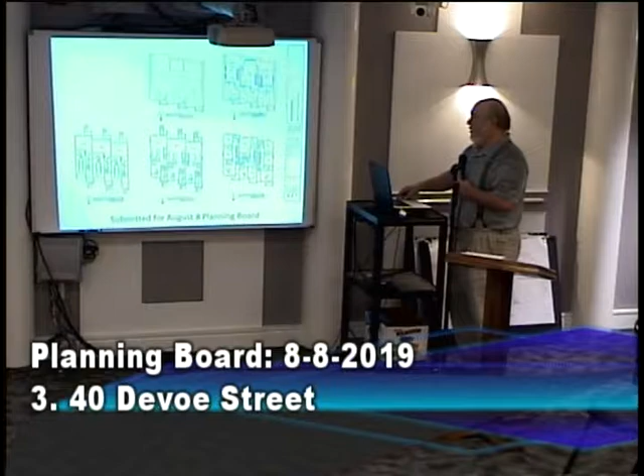These are the elevations, the massing that we developed. Obviously there will be more work done at some point on these, but we want to know which direction we're going first. This is just an enlargement of that front, showing as the units step in, they also step down the street. The garage doors here are 1-car garage doors.

Those are set back in 4 feet. So effectively what happens is there's this kind of play of massing, jogging in and out, and the garage doors jog back in to align with the unit next door. So there's a kind of relationship and weaving, which we think makes it work fairly well. Each one of the entrances is demarcated by a small court, so I think it would fit in very well with the character of Devoe.

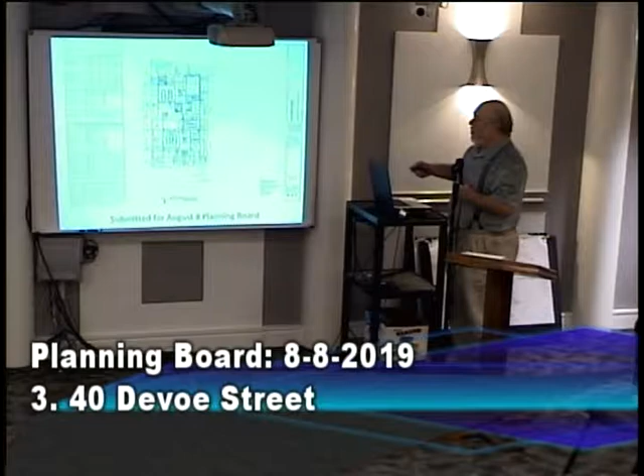The other unit we've referred to as the courtyard units. I'll give this a little more attention because we presented the other last time. The way this works is one unit is in the front, one unit runs the other direction, forming a courtyard with the third unit. All of the cars are in off the courtyard, and all of them are two-car garages, so all the parking is inside. The size of this courtyard is sufficient to accommodate people coming in and going out.

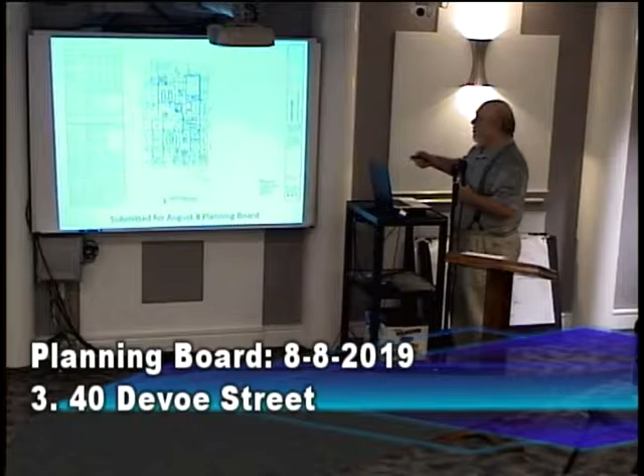There'll be no room in this courtyard for anybody to park outside, so all of the parking would have to be in the garages. The entrance to one unit is here, the entrance to the other two units is here. If we go further with this, we've been looking at what happens if we move this garage in further and have one entrance on this end, one entrance coming in that way, and then the other here. This unit also has an exit out to the courtyard from the lower level, so all three would be able to access the courtyard. This plan shows how that all works.

These are the floor plans. Again, the units are effectively the same size, around 1,950 square feet. All of them are three-bedroom, and they all have a small area in the attic.

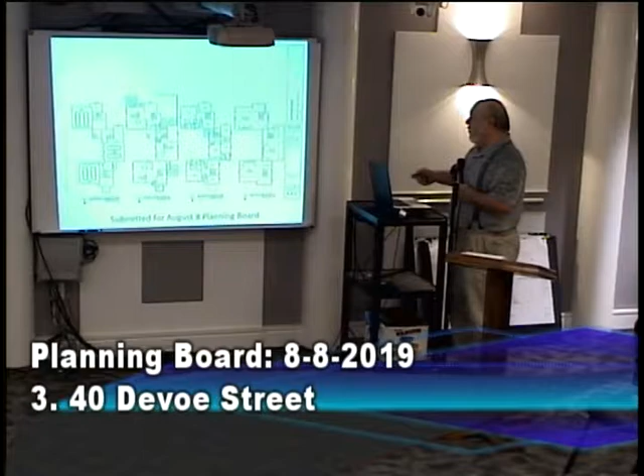In this one, we get a smaller room downstairs because we've got a two-car garage instead of one. This is the massing we looked at with it. The idea is to wrap the outside, have that be a relatively dark exterior, and then have the interior courtyard be stucco, so we feel like a bright, open space.

This is very simple at this point in terms of the fenestration, massing, and detailing. But we also think that if you look at the other houses on Devoe, that's an appropriate approach.

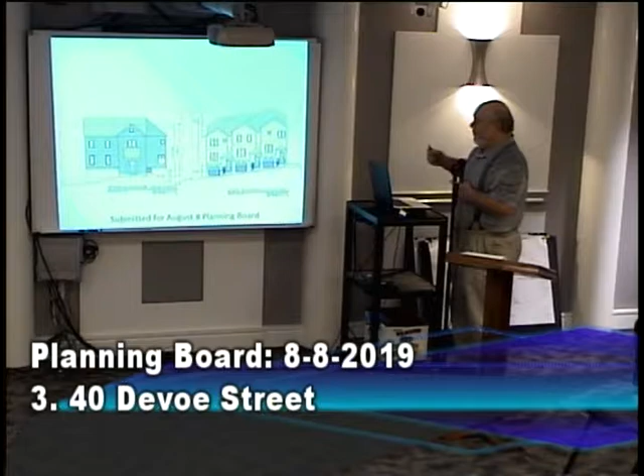Even the older houses have pretty much been simplified in their massing and detailing. So this is the two side by side - the grade here and the grade here are parallel to one another. At this end, this sticks up a little further, but it also jogs itself down and follows the street perhaps a bit more.

This again puts the three townhouses in their massing compared to the courtyard. You lose back green area in this scheme, but each of these units has an exterior terrace area that would work off of them.

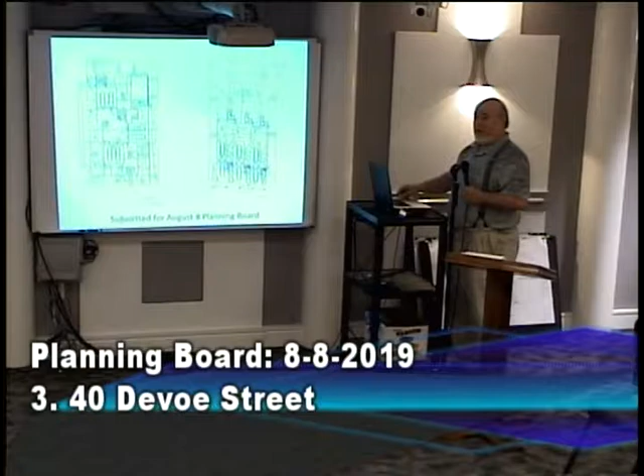The way I look at this courtyard is, you've got a 4-year-old who wants to be riding a bike or doing something - that would be a great place for them to be playing. I know it's weird to say, with cars coming in and out, but with 3 units, I think they'd understand that they're not speeding in that location.

I know that speeding was interesting - I had conversations with people about Devoe, and there's a major concern about the way people speed now. I think it's great that they have that concern, but when I notice what speeding is on Devoe, it's when somebody's going about 20, 25 miles an hour. It's a really nice, slow, quiet street, which it should remain.

We then decided to take a look at this a bit more in 3D. I can put the 3D model up if you guys want to spin around, but I found it's often easier if we just show you some 3D views as we go along.

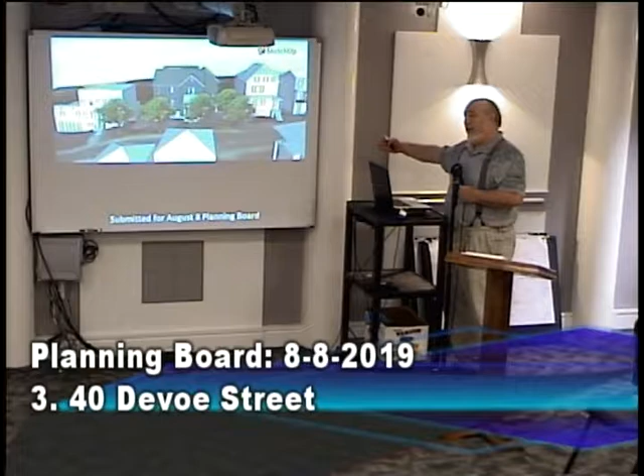This sits way further back on the property, so the other people who have backyards would be looking down and seeing the building instead of the backyard. So it's kind of a toss-up, I think, which is the better option.

These are all kind of parallel views to what I showed on the townhouses - that was from the east, this is from the west. This is looking down Devoe, and this is looking up Devoe.

This is the view from the east aerial, so you see the courtyard and the way that massing works. This is the back from the east and the back from the west. Anything you want to see again?

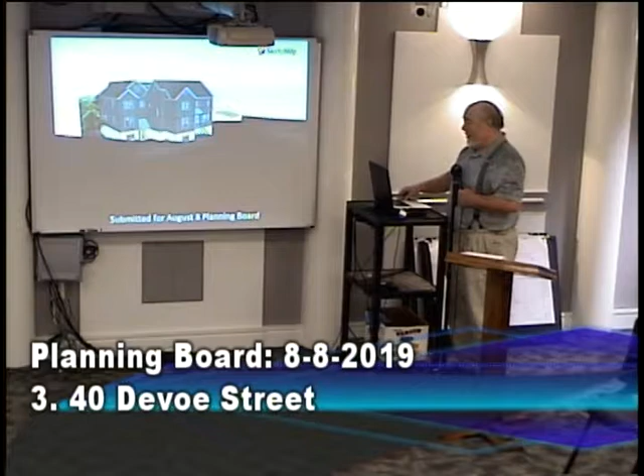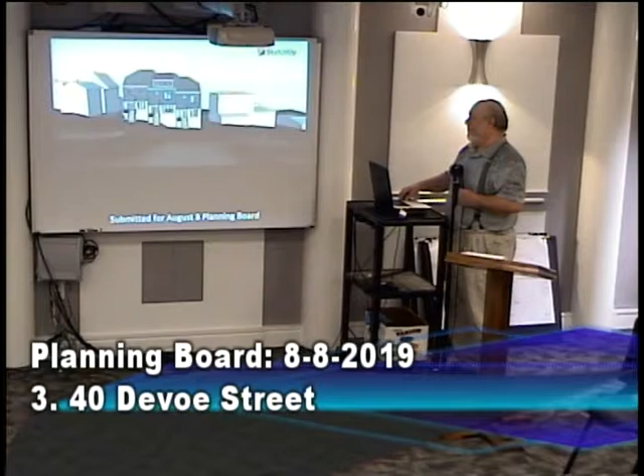Want me to try and do it in reverse? Well, thank you for doing all those views. Yeah, that's very useful, very helpful. So I'll just kind of stop at some point here, maybe, for questions and answers.

I think I was the one at least interested in seeing the courtyard version with a little more detail, and I like it. I think the way you've got it set up, it does fit the streetscape well in terms of that one building's side. But on balance, I would prefer the one you're showing now.

So you want to take a vote? I'm just the opposite. Are you telling me you prefer this townhouse? So first, I want to say I really appreciate the thoroughness of the presentation - there's nothing else we could ask for. We'll see how much agreement or disagreement there is, but I prefer the courtyard scheme.

But I guess that's what we'll decide tonight - the courtyard scheme.

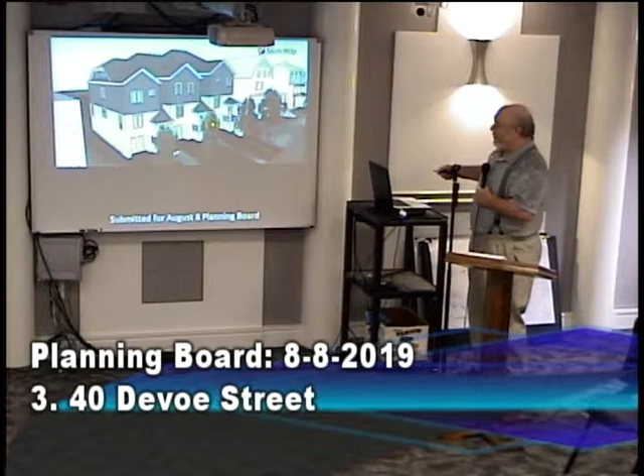Where would people that were visiting park? They would park out on the street. In the townhouse scheme, we've got extra room adjacent to the car, so you'd be able to get a guest pulling in off the street in addition to the other car - one in the garage, one outside. George will quickly say he doesn't think we've got enough, but we actually do have 16 feet, so somebody pulling up here has the ability to tuck the front of the car back in and definitely pull another car off the street.

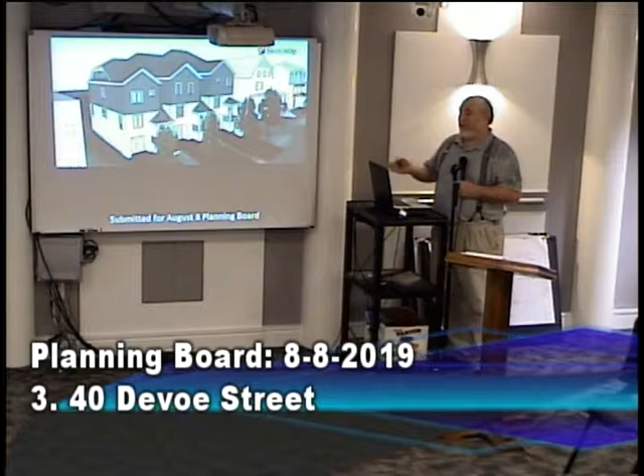And just to be clear, what you're looking for tonight is just clear direction about which of these two to develop to the next level? I would not mind if you approved it, but since we're not there yet, and he isn't here, and I'm not really certain he would, I'm just looking to move forward, whatever that means.

Right. Patty, can I see that view - I guess it's a 45-degree down view of the courtyard - so I can get a feel for what the rear yard massing is like? This one, no, from the street side of the courtyard. Well, it was a view from above. I thought there was one. Yeah, there it is. Thank you.

Right now, some of these go pretty deep back toward this house next door, but we're effectively a unit further with how far that goes into the back. Now, in other ways, that probably gives some privacy to the yards of the neighbors on both sides.

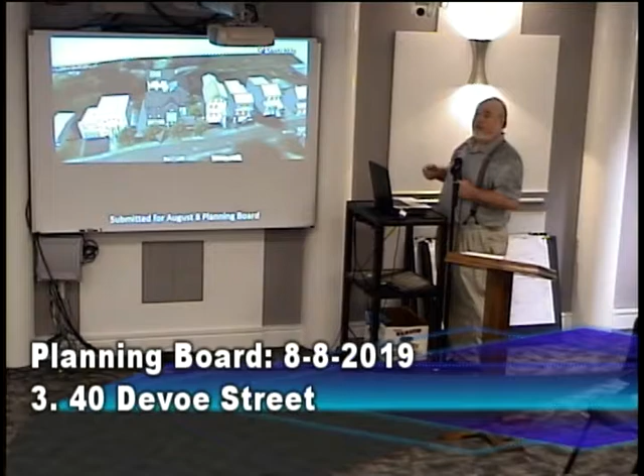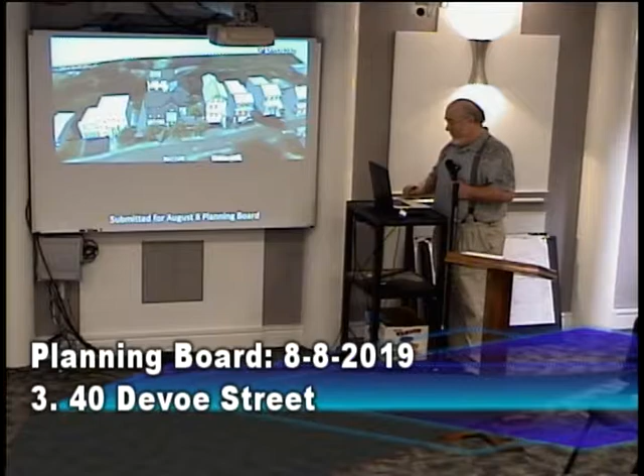You have all of this kind of tight up by the street. We thought the idea of this band of green openness coming back through there was positive, but of course there are plenty of examples of other buildings going into the backyard.

And those are houses? Is it a garage in the back there, or? English Lane is an interesting mix - I was going to say cacophony, that's not a very nice thing to say, but it's a real mix of different things. There are industrial things back there, businesses, residents, apartments. It's very cute in a way - if development takes off and lots of buildings get fixed up, it'd be interesting to see if something similar happens on English Lane, if done right.

So you've got a lot of places where you've got buildings that have a width facing that street. Now this is on the corner, it's actually fronting the other side, but it's still the facade that faces towards Devoe.

This is a public hearing. Is there anyone that wishes to speak on this application? Anybody else on the board want to have a chance to?

I have to say, I personally liked the courtyard option at the last meeting, but now looking at this elevation, I like the repetition on the first one. Oh really, but you don't like it, Bob?

Let's not forget also the architecture review board has looked at these, and they have a clear preference. Did you show them both, Patty? We showed them both concepts and the massing.

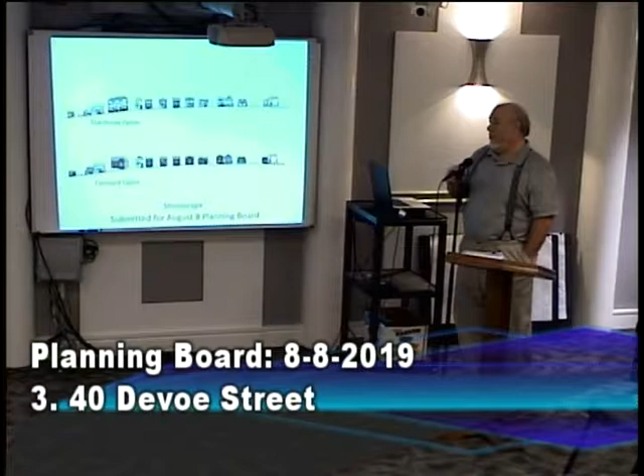In the end of the day, it's 3 garage doors side by side, separated from each other, stepping down, sunk back in under the house. The illumination for them is all recessed, no lights shining out. I'm hoping we're getting a better code in terms of light that can go off the site, so we don't have more garages all of a sudden become a problem.

I also think the street is in play, and there are other people on the street who are talking about doing things. The only way I can imagine that is filling in the missing teeth. Right, but maybe not with garage doors.

But Rob, I also think there's a counter-argument that the people most impacted by this are going to be the neighbors. With the larger structure in the backyard, if they're sitting in their backyard, now they've got windows looking down right into their backyard, and I think that's intrusive also. The adjacent property, as Patty pointed out very honestly, already has a deep structure to one side, but still 26 feet shallower than what we're proposing.

It'd be a better case plan if it was 2 units. You've said that before, Steve. I don't agree with making it smaller — we need places for people to live. Yeah, no, I'm in the minority.

I think we have enough understanding, I think we can deal with the engineering, and hopefully we'll be in a position that you've got everything we need to make a decision at the next month.

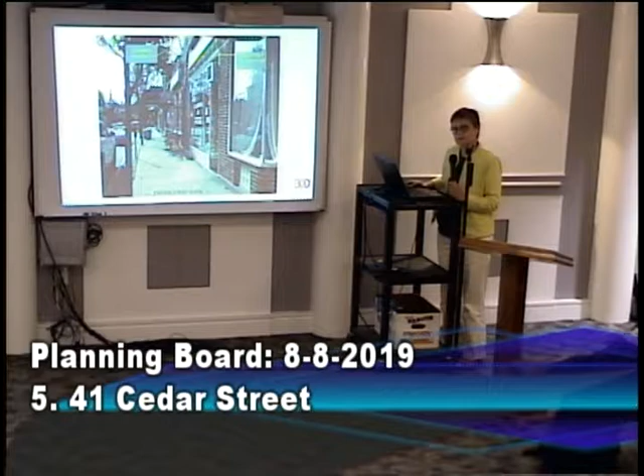So when I add everything up, I have to look at it and say, is it really worthwhile? What are we actually saving here? And it opens up my thought process to say, maybe there's something that we could put here that would be better from a use standpoint, maybe something that would be better from a community standpoint, maybe something that would help this community grow in a different direction. Maybe this building, both of these buildings, have served their useful life.

Now, from a preservation standpoint, that's a really hard thing to get to. So the fact that I actually got to it is frustrating and interesting both on my part. It's something that I don't get to very often. But again, I think you can see here where you've got the very wide joints and the joints coming across here. So it's very definitely got issues that make me want to say, hey, what else could we possibly put in here that would work?

Thank you. Thank you.

Good evening. Good evening.

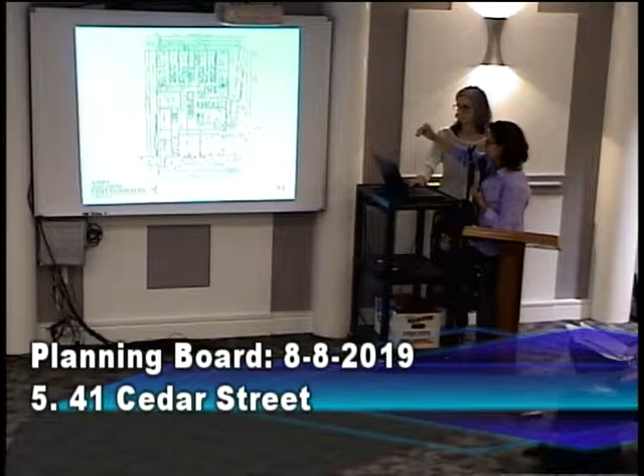wrap the retail and storefront around the corner and have a little seating area, a little park there. In back of the retail, we will have 3 units on this level and about 500 square foot space will be, there'll be something like a gym for the residents.

Second and third plans are very similar. Each plan has 6 units, and we have an affordable unit that will be almost 1,000 square feet, 2 bedrooms, just like all the other units are also 2 bedrooms. They range from 1,400 to 1,600 square feet.

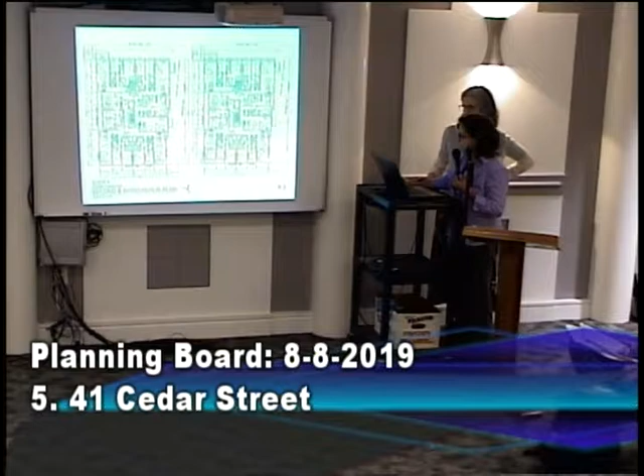We have some outdoor space with balconies on the west and the south side of the buildings. And another item we've introduced in response to discussion at the last meeting is on the 3rd floor plan. I wish I had a pointer. We have a setback part of the building so that we can create a— right here, we've jogged the building, but we did this because we wanted to create a 2-story facade here and set this 3rd floor back, so that we could have a transitional building between the 3-story and the 1-story building, the existing 1-story building to the east of the site.

And then on the roof, we will have about 3,000 square feet of common roof deck. We have a bulkhead for elevator and stair, and then 5 private roof decks, and a green roof on the southern side, which will help with our storm management and reduce the heat island effect of the building.

These are our sustainable features. I happen to be a LEED AP and also a Passive House designer. We have sustainable features in all of our projects. So at this point, we're exploring ideas that we see in the LEED rating manual, such as use of low VOC materials, finishes, and use of locally harvested and recycled content materials.

We're going to do waste management during demolition to minimize waste materials in the landfill. We're going to see if we can salvage and recycle the materials removed from the building during demolition. We're going to have recycling and composting centers for business owners and residents. We will have a green roof to manage stormwater runoff and reduce heat island effect, a rainwater collection reuse system, energy efficiency using Passive House principles and standards, and bicycle racks.

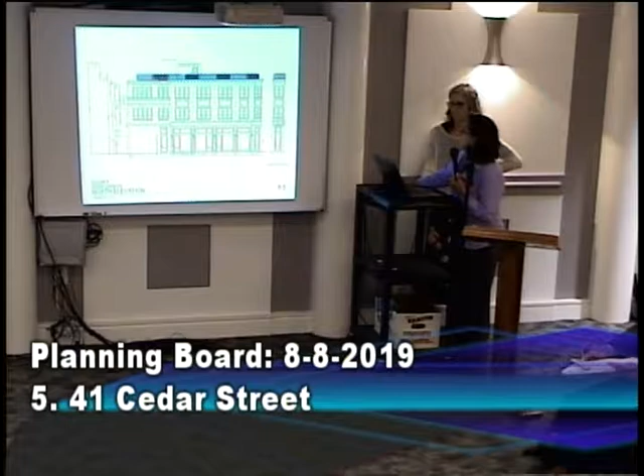This is our corner element, which has a glass roof at the top of the piece there. And you see the next slide on the side elevation. So this retail area turns the corner, since we have the bend in the road, and we took advantage of the idea that we could see this corner element, we have more storefront glass and retail space. And then once you leave the pocket park going back here, this becomes residential. And these are some of the balconies that we have on the side.

This is our section. We are having, this is a 3-story building. We have a ramp coming down to the garage. All the parking for the residents parked underneath. Retail is in the front. Amenity space is tucked in there, all the lobby space, and there's 2 residential units that face the back of the building that has small patios.

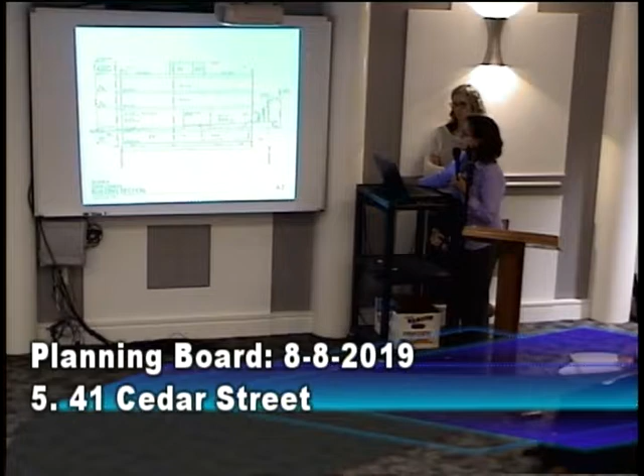This is our streetscape, our current design. What we have done since we last met, we have gotten more accurate information on the building next to us. We have a surveyor provided the elevations or heights of the theater building. This is the theater building at 39 Cedar, and to the right is 43, 45 Cedar. So this is existing, and this is proposed.

Down here is, this is the building that has the 1-story piece existing with the 3-story house in the back. And this is proposed. This is our new building next to the theater building. Actually, and you can see you go from 5 stories, 3 stories, 1 story, 1 story, 1.

The theater building is 41 feet tall, and the top of our roof is 40 feet tall above the sidewalk. This is a blow-up of the streetscape, just showing the existing conditions where we have the theater building, top of that theater building, with the sign tower. This is the old house behind the storefront. And again, just a blow-up to show you how our new building is sitting next to the theater building.

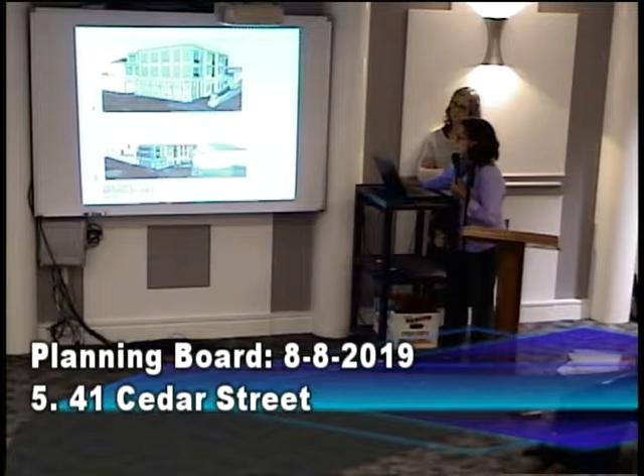This is the view looking towards Cedar Commons from right next to the church property, showing how the church is up on the hill there. And this is an airplane view showing the massing of the proposed building next to the theater building with the church beyond.

This is another view that shows the relationship of the two buildings. You can see the church is up on the hill, the topography climbs up, and there's a pretty big space between that building and the Cedar Commons project.

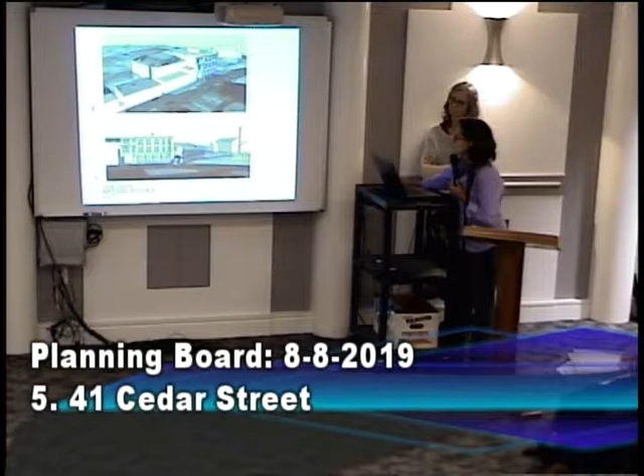Actually, I'd like to bring Diane back. I think she has some comments that she'd like to share with you about the design of the building, how it fits with downtown.

I think one of the things I talked about was that this was a very lively street with a lot of variety, and what is being proposed really plays into that. With the different massing, with the two different techniques of separating the residential out visually with different materials, setting it back and setting it to the side, that helps break things up a little bit. Pulling in some of the historic elements in the spandrels and also in the cornice helps tie this back into the rest of the streetscape.

You also have in your planning documents a very strong desire to use historic elements again. One could go a different direction, taking a more modern approach, but that's not what you've chosen in your planning documents. This is a much more conservative approach, and it's what you've got. So I think that works really well.

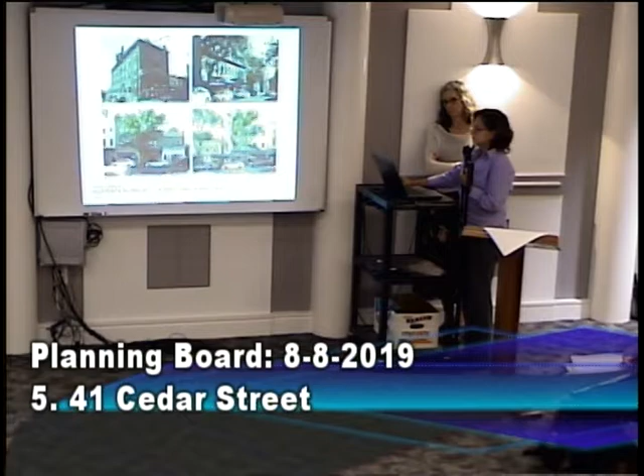These are the historical images that we found at the Historical Society of Hastings. We have an image looking down Cedar Street. This image to the right actually is not our site—it's next door, showing an old house behind and a one-story long facade with, I think, 4 or 5, maybe 7 bays. We could not find a photograph of our site the way it was built originally.

But they're still very inspiring because you see the transom windows and the brick detail, all the different cornices on the buildings on Main—some are 2-story buildings, some are 3. And then 75 Main, with a big storefront glass and transom windows.

So I just wanted to let you know, we have looked at the buildings that give Hastings its character, its sense of place, its community. We really took all these into account when we designed the building.

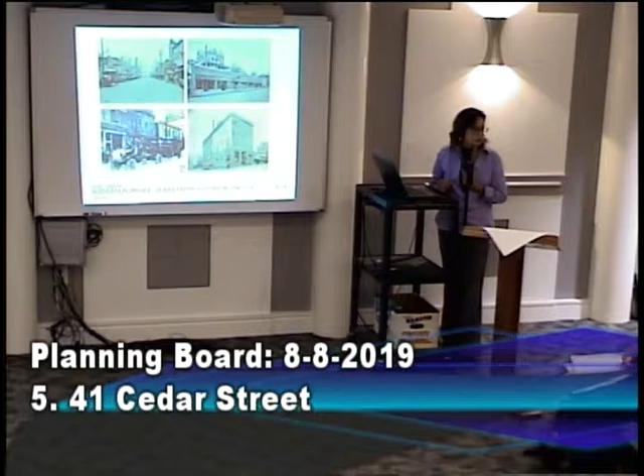And now I want to turn this over to... I think, let's go back to the...

Hudson Engineering will discuss the engineering aspects. Hi again, I'm Thomas with Hudson. I'm just going to briefly go through the engineering site plan.

The site utilities will come out adjacent to the driveway and connect within Cedar Street as well. We're working on updating some of the information in the right-of-way. Once we have that, our plans will be updated accordingly.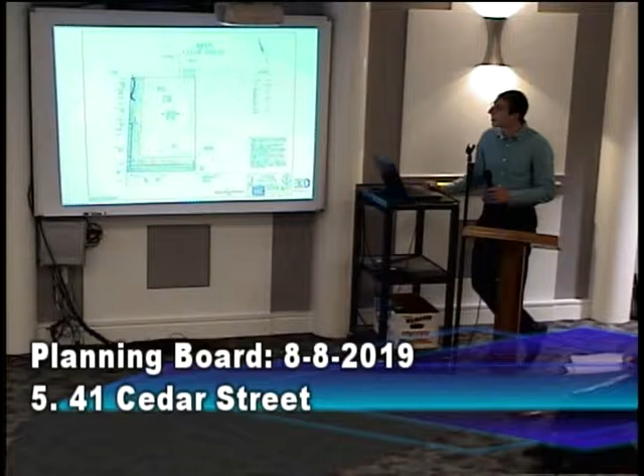Really, I think that's the bulk of our information. So I'm going to pass this right along to the traffic engineer.

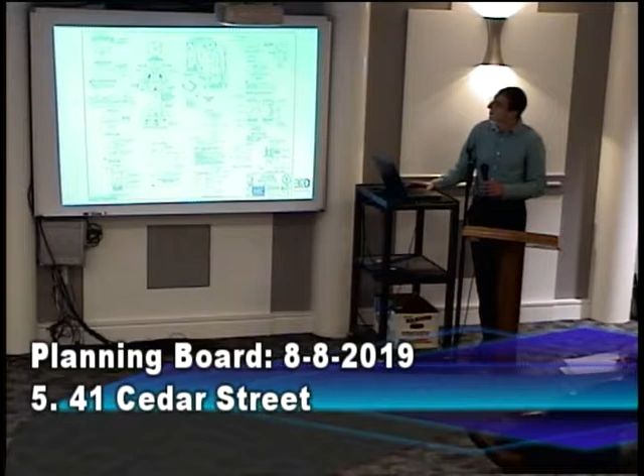Thank you. Good evening, I'm Brian Dempsey, and I'm a partner at the firm Provident Design Engineering. I'm filling in for Carlito Holt. I'm a licensed professional engineer in the state of New York, as well as 5 other states. I'm also a certified professional traffic operations engineer, and a member of the Westchester County Traffic Safety Board. Since the last hearing, Carlito did submit a letter regarding one of the comments about whether the building from the project would impact the sight distance coming out of the church.

As he explained in the letter, based upon the curve in the road and the on-street parking, a vehicle exiting the church will be basically in front of this building, the building of the project. So the project would have no impact on the sight distance for a vehicle coming out of the church parking area.

We did see the county review letter. The only traffic comment in the county letter was the discussion about possible bike racks in front of the site. There is a bike storage area for the residents within the garage, but we can put in a bike rack in front. That would be up to the village, if they're in favor of it. Our one issue is whether it would block pedestrians and such, and where the location would be. We've also reviewed the Han letter.

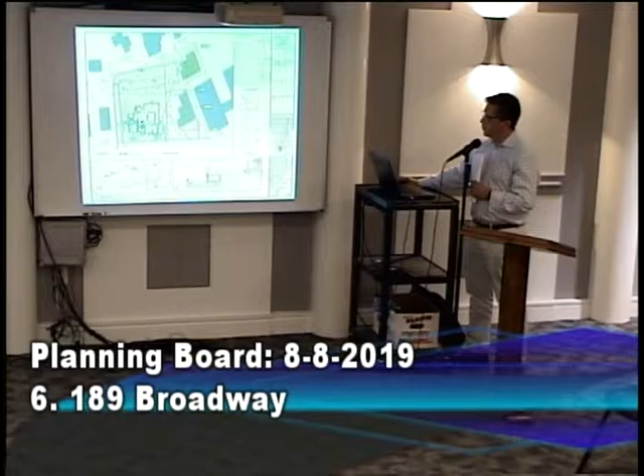Well, currently now, that's all hedges. That's right. So you're proposing to put an area where they would put their garbage? No, I assume they need to bring it out to the curb, so it's just something where you can pull the trash can across. So frontage.

Okay, all right, so the cluster development, I'm assuming that's the recommendation being taken, that we should not pursue cluster, but we'll pursue, since this is achievable, to do it through subdivision, correct?

Right. And I really appreciate you trying to preserve the view shed from that area. The long discussions we had about the development on Livingston Avenue and the view there make me extra sensitive to that area, to the views of the river.

To that point, Javier, in terms of opening up the site, what are the implications of bringing the building that's in between the existing building, the one that's closest to this one here, moving that forward to closer to Broadway? Does that open up more of the view or obscure it more?

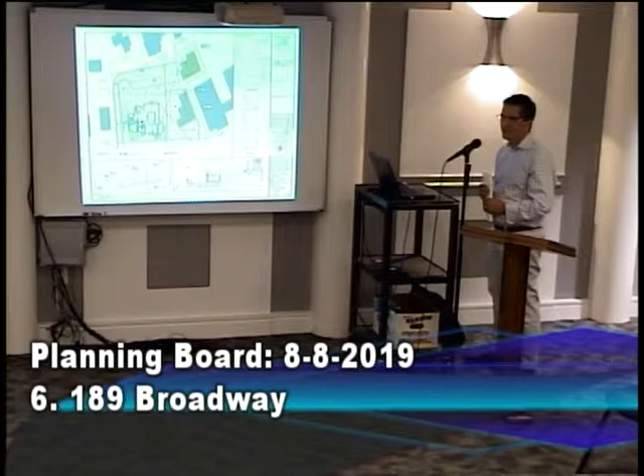So it's a little bit—I think Mr. Steinschneider already has a townhouse plan for you. Yep. Thank you. You're welcome.

That was a pre-submission conference, and we'll continue.

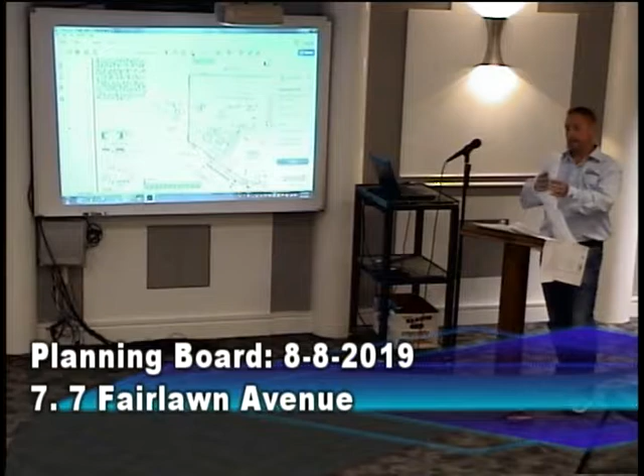In lieu of a lighting plan, do we have a lighting plan? Well, we'll put it on George's list. Or just put it in the resolution that it'll meet your best practices criteria: dark skies, everything, down lighting, everything's laying down.

Should we close the public hearing? Yeah, I think we should. We'll ask if anybody wants to speak. You want to second that? Second. Anybody to speak on this? No? No. Okay, no. Close the public hearing, I second it. All in favor? Aye. Okay.

All right, there, we have a resolution here. Oh, we do? Yes, of course we do.

Village of Dobbs Ferry Planning Board Resolution granting site plan approval for the construction of an in-ground pool together with related site work at 7 Fairlawn Avenue. Whereas Daniel Fostner, owner, has applied for site plan approval to construct an in-ground pool together with related site work in the side yard of his single-family house at 7 Fairlawn Avenue, denoted on tax assessment maps as section, and gives the description in that way. Whereas the following plans and documents were submitted as part of the application, and lists what we've received and reviewed. Whereas the planning board is familiar with the steeply sloped site and surrounding area and the proposed improvement plans, and at their meeting of August 8, 2019, held a duly noticed public hearing and all comments were considered.

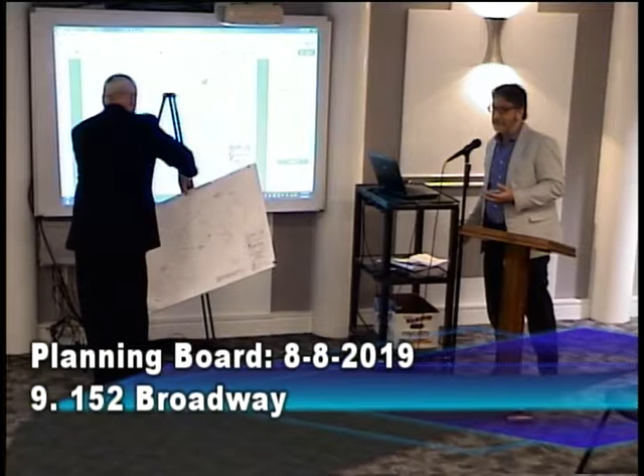Good evening, I'm Dennis Ross from Brooker Engineering, and I'm going to use the board tonight. For some reason the imagery of the PDF is not showing up well. So, as Dale mentioned, this is a housekeeping maintenance type project. I'm not sure how we got to you folks for a project like this, but here we are. So this project consists of...

Reconnecting existing roof drains. There's really two types of roof drains: ones that discharge through drainage structures, and others that daylight, and we are preserving that arrangement, so there's no change. It's maintenance - it's where the downspouts connect to the underground system, and they weren't maintained, so they need to be replaced. That's what we're doing, is replacing roof drains.

The other issue, as Dale mentioned, is that this site is subject to groundwater and groundwater pressure, such that it destroys the pavement. If they were to replace the pavement, it would just continue to be ruined. So in order to cure the issue, you have to cure the groundwater so that you can repave the site and go on. We have proposed a network of perforated pipes, under drains surrounded by crushed stone envelopes. And that's the project - roof drain reconnections and under drains below the pavement.